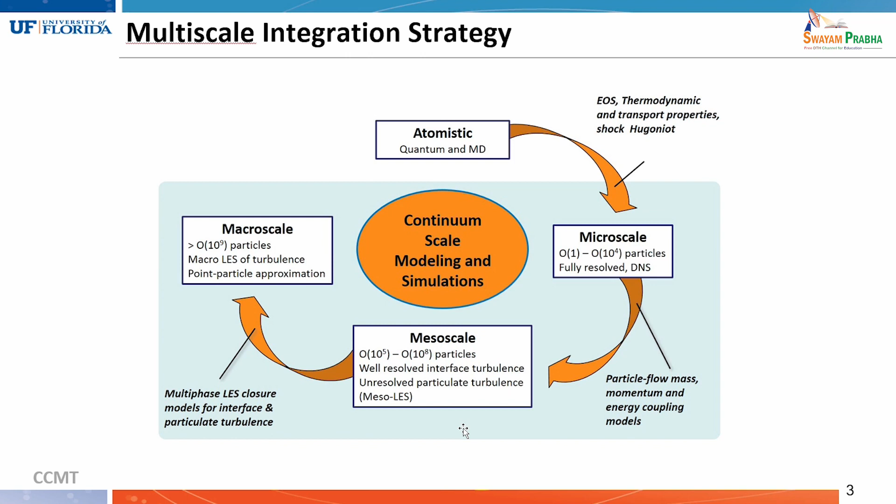The question is, could we do the same kind of averaging for multiphase flow, and when we do coarse-grained simulations, can we have good models that capture all the things that are going on inside that averaging volume? That's one of the holy grails, and lots of people are working on it. Now, another way of looking at this problem, for example, I just want to give you some example.

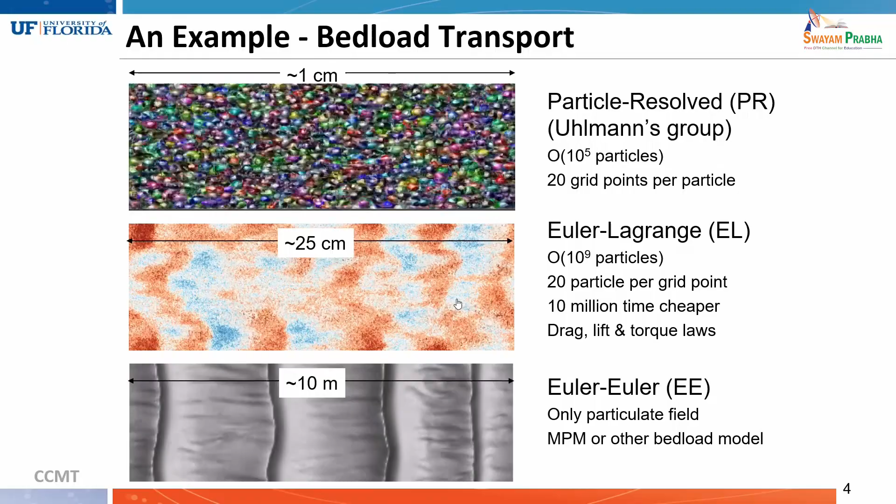Now, this lower scale simulation has a lot of information, but if you're finally averaging and you get one curve or one data point, you're throwing away a lot of valuable information. So one of the things that we are trying to do is how can we take some lower scale information and not even say what the model form has to be, because many times we say, oh, let's use some sort of eddy viscosity model. Once you say that, you have assumed a certain form, and that form may not be correct anymore.

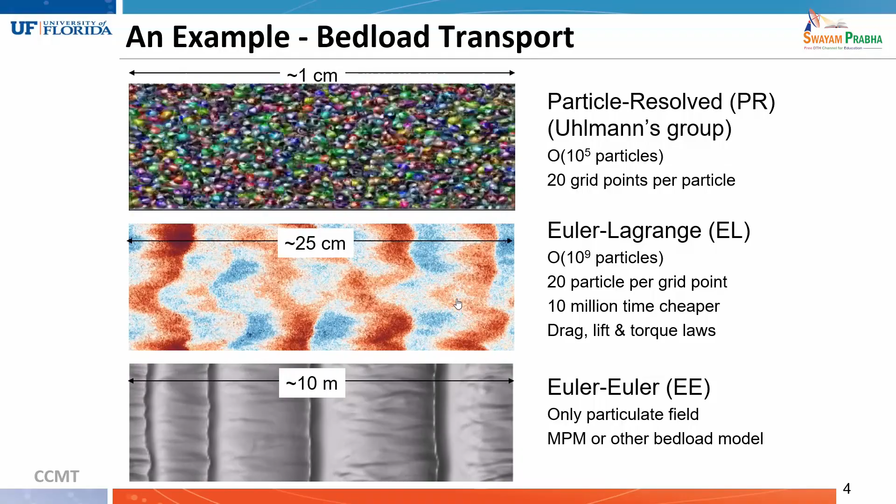So I believe that machine learning has a lot to offer, and we have found a lot of really good ways to use it, but with good knowledge of the physics of the problem. Okay, I was talking about this problem, a very similar problem. So here we have experiments where you have an explosive surrounded by a bed of particles like this. The explosive is in the interior, and when the explosive goes off, it just hurls the particles, and that's the fingers coming out I showed earlier, you remember.

So to do that, we wanted to first understand how a shock goes through a bed of particles. I mean, nobody knows really. Okay, so we said that we're going to study it, but this isn't good enough because we made a lot of assumptions. It's particle resolved simulation, and it's teaching us something, but not everything. Then you do Euler-Lagrange DEM, try to understand how force chains travel, etc., how the fingers form. Then you get knowledge. I mean, these are just show and tell.

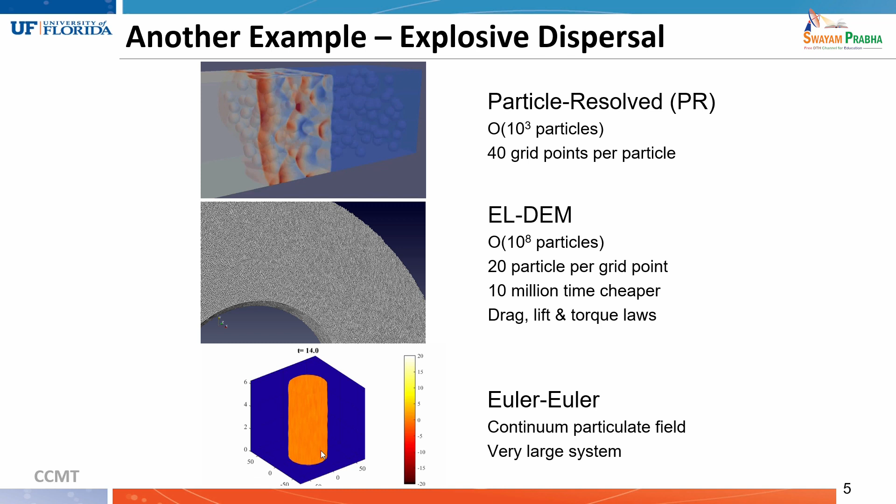We haven't connected these things because it's still out there. We want to do these things, but it takes a lot of effort and time. So how do you get this knowledge and pass it on to Euler-Lagrange or Euler-Euler simulation, where you can talk about a big explosive system with trillions of particles, and how do you do that? So again, this is another example of that.

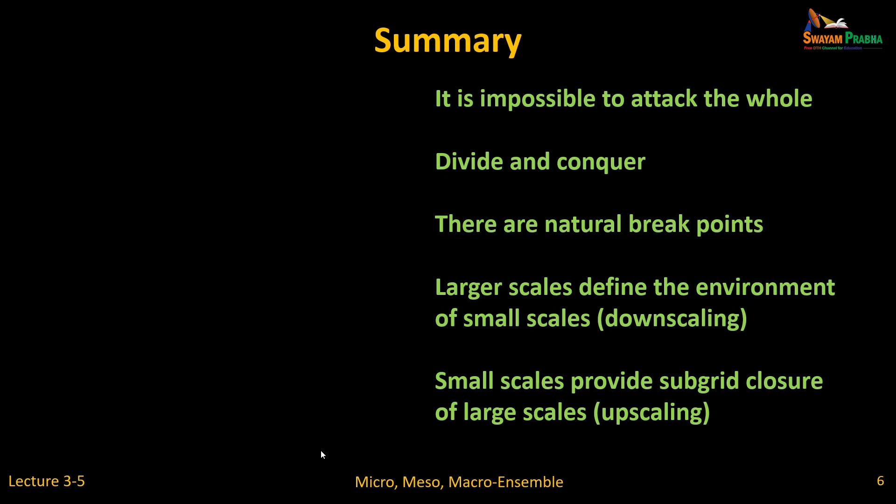Okay, so the summary is that it's impossible to solve the problems as a whole. So we need to divide and conquer. One good thing about multiphase flow is that there are natural breakpoints in length scales. In classical turbulence, the same problem exists, but I see less hope there. I have a lot more hope in multiphase turbulence. So anyway, one needs to focus on downscaling as well as upscaling. That lecture ends. I want to now get into some details of modeling, starting from a single particle, etc.

Okay. So when we're talking about the macro scale simulation, I work on the solid rocket motor problem. So then how do we comment upon the accuracy? What comments can we even make in that respect? Well, compare with the experiments. If we do that, for my particular problem, I don't have enough experimental data to validate it against.

Make some pretty pictures and the people who are giving you money will be happy. But at the same time work on the science. Okay, I mean it's a difficult problem. Everyone is dealing with difficult problems. But you know, that's an interesting point. A lot of things that I'm talking about are very fundamental. Now you want to look for opportunities to address them while solving real problems of the day. Many of us can't wait for another 20 years to solve some of the problems. So you've got to go do it.

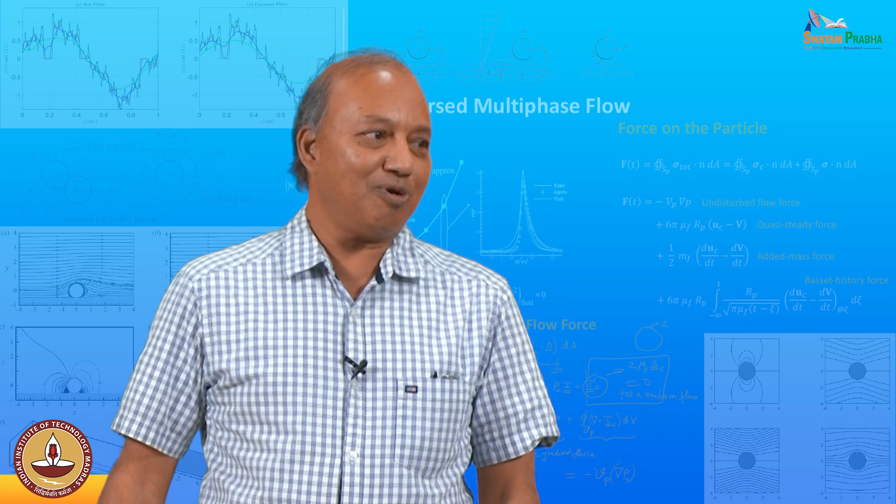But I think there is always a fraction of our time we can devote to finding where the weak links are and fixing them. If we are aware, at least we will be cautious, and that's why nobody builds a next stage rocket without actual experimentation. They don't trust computations yet. But we want to get there with modeling and simulation maybe someday.

And machine learning, I really think it has a lot to give us, because some of us are doing micro scale simulations, like he talked about particle resolved simulation. Lots of people are doing Euler-Lagrange DEM. Other people are doing Euler-Euler.

It's just that we haven't hooked those things together yet, especially the way computer scientists have done. You look at machine learning, these TensorFlow networks, etc. They work really together, and everybody's contribution adds to some big part. But we mechanical engineers, we really are sort of siloed. I do my simulation, I publish my papers, but never share anything.

Okay. The question is, how do we do a lot of our simulation and spread the knowledge around and really link the scales? That's the next big revolution. I don't know how to solve it, but as the editor of multi-phase flow, those are the kind of stuff that we want to do. We want to encourage young people to find ways so that we can leverage a lot more out of what we do than what we are doing today.

Okay, we're not really breaking through. Well, we are making progress, but not revolutionary progress. So especially with machine learning, I'm really hopeful that we can come to a stage where we can really make substantial progress in our understanding and modeling of multi-phase flows.

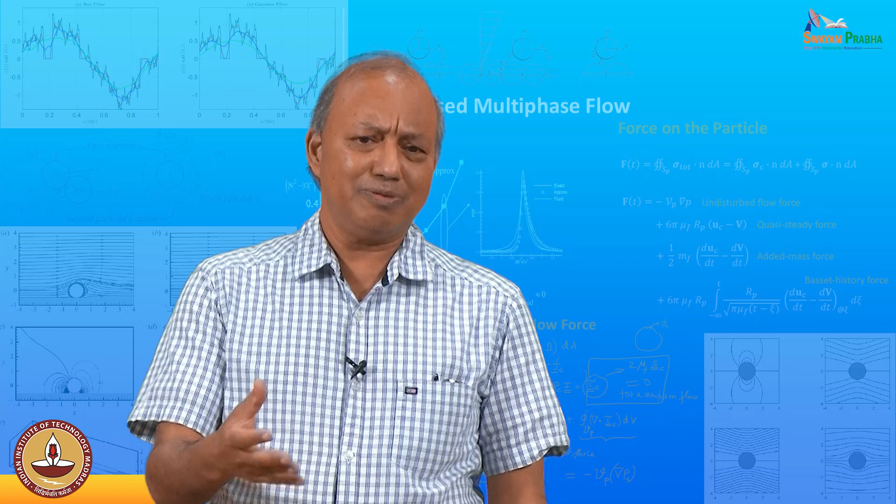So what I mean by mesoscale simulation is Euler-Lagrange simulation with point particles, moving them using drag laws, maybe DEM, etc. Okay. Now the same problem going from mesoscale to macroscale, you have to now do the mesoscale for every different scenario that's likely to be seen in a macroscale, which means you have to do maybe tens of thousands or millions of mesoscale simulations. But now these mesoscale simulations are as good as possible. Okay? But here again you can use machine learning to do generative models and then develop better models that can be used in macroscale simulation.

In macroscale simulation, which is trying to do a full riser in a chemical industry or a full solid rocket motor simulation from the head end, star grain to the body and to the exhaust plume, that's a tough simulation. But now you have a whole system. You have to do an Euler method of some sort, using subgrid models of varying kind. But now these subgrid models are very complicated, but they are very well informed because they have been trained with deeper physics embedded in them, so that you could trust those results. So that's the kind of vision that we have.

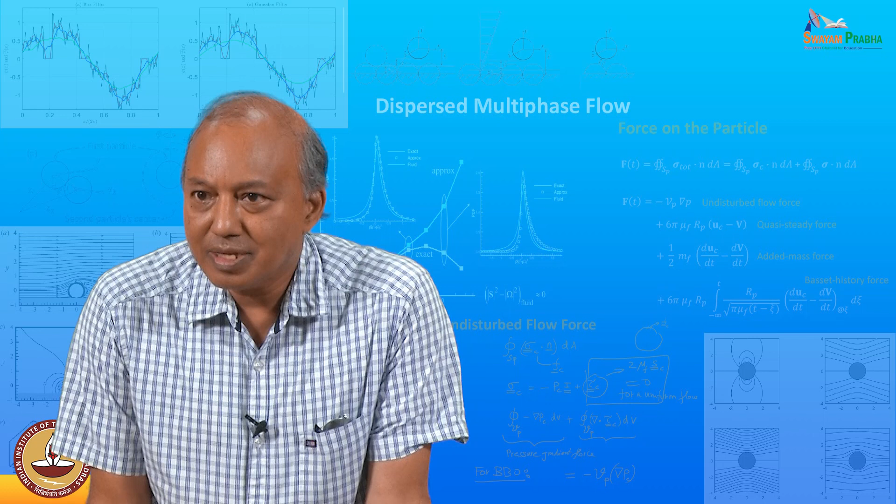So I would say, to summarize, microscale is fully resolved, particle-resolved kind of simulation. Mesoscale is sort of maybe Euler-Lagrange simulations, DEM, and macroscale will be Euler-Euler simulations of some sort. And at each level, you have to start from some kind of first principles model, some assumption. You can't go from one to the other by averaging or anything. Well, but once you go to mesoscale and macroscale, averaging is unavoidable.

See, in the case of a solid rocket motor, maybe 10 meters, there are aluminum droplets, oxide particles of 1 micron and so on. So you have length scales from sub-micron to 10 meters. There is no way we can handle that. And that's what I said, that the entire range of scales is not possible. So maybe your grid may be a centimeter at the macroscale. So what happens within that grid has to be modeled in some way. Okay, and that's what I was talking about. Any questions?

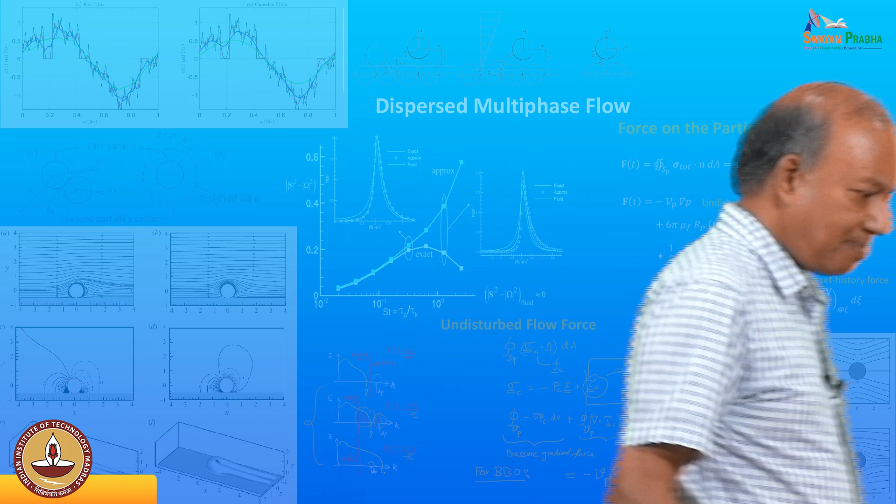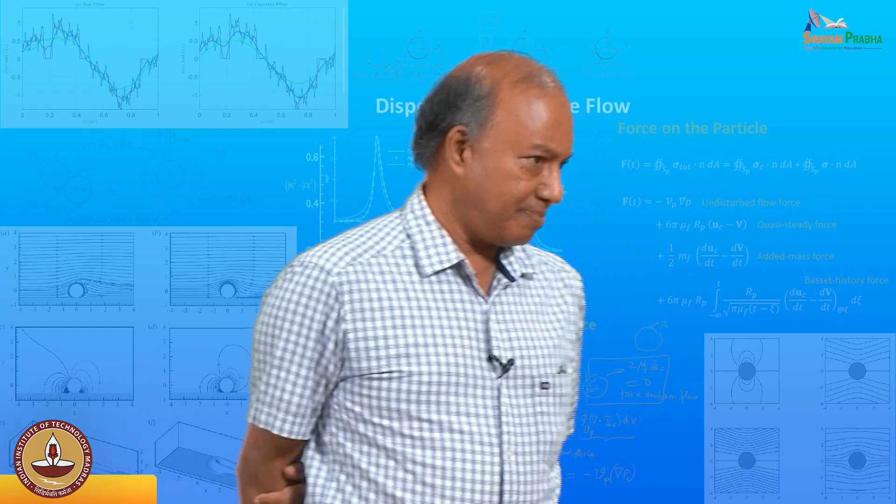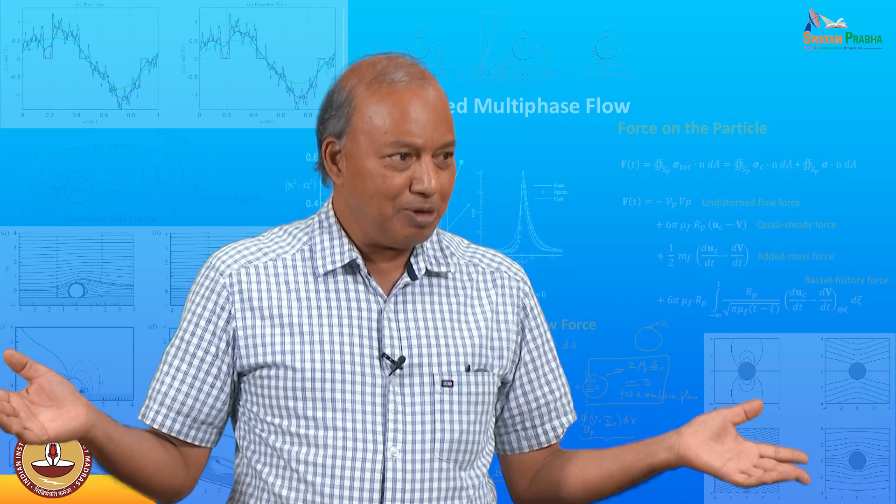So one more question I had. Whatever methodology you are saying for these multiphase flows, shouldn't the same things be applicable to understanding single-phase turbulence as well? Yeah, absolutely. And people are doing it. One of the nice things about multiphase flow, in my opinion, I said that a few times, is that you know where the particles are. So particles serve as a marker, and particles are clustering. Now in turbulence, there is a wide range of eddies and scales. There may be a low-dimensional projection, but how to project it is very hard. Eddies form and die. Thankfully, particles don't form and die on their own. So those markers can be tracked.

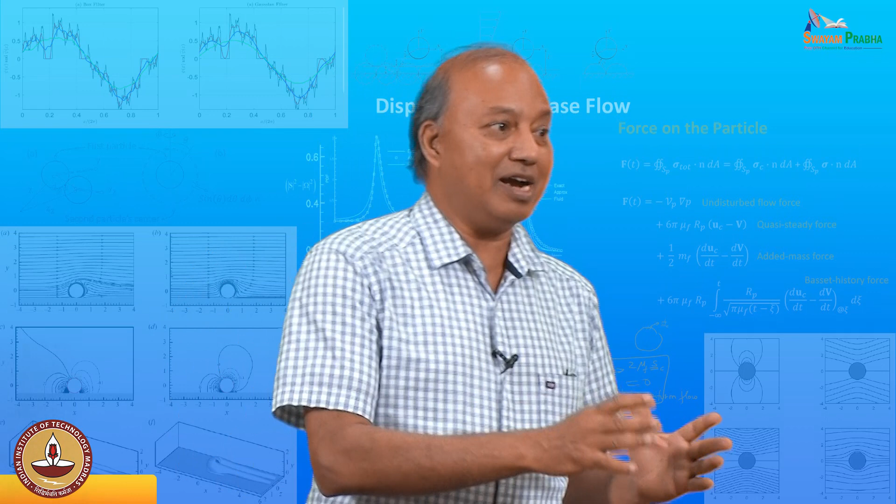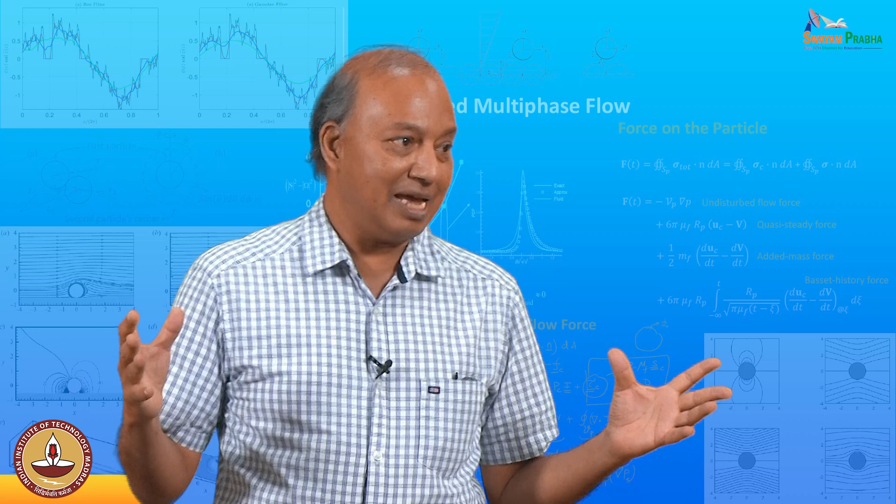That's why I said that multiphase turbulence in some ways is complicated, but in terms of divide and conquer, there's a little more hope than straight up, say, atmospheric turbulence. One of the challenges is that eddies come and go, and they are very important. How to divide and conquer is not very straightforward. So one of the hopes I have is that maybe the multiphase flow turbulent closure approach can teach us how to do vortex-based closures for classical turbulence.